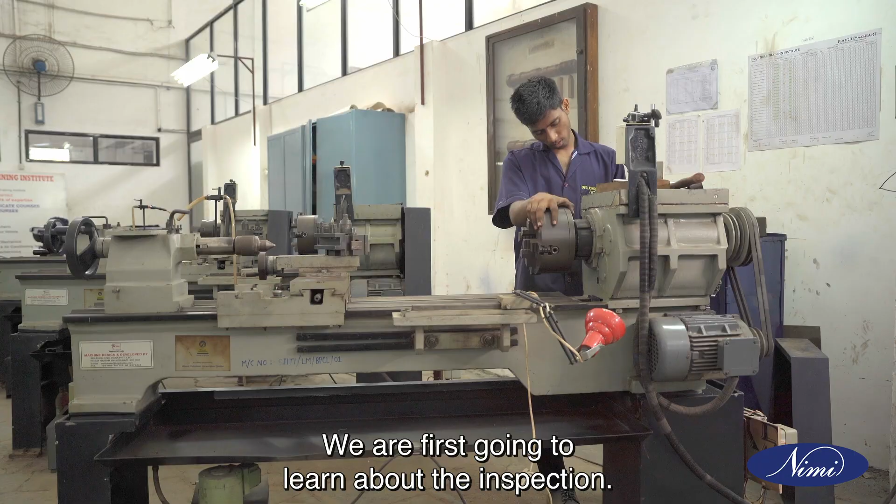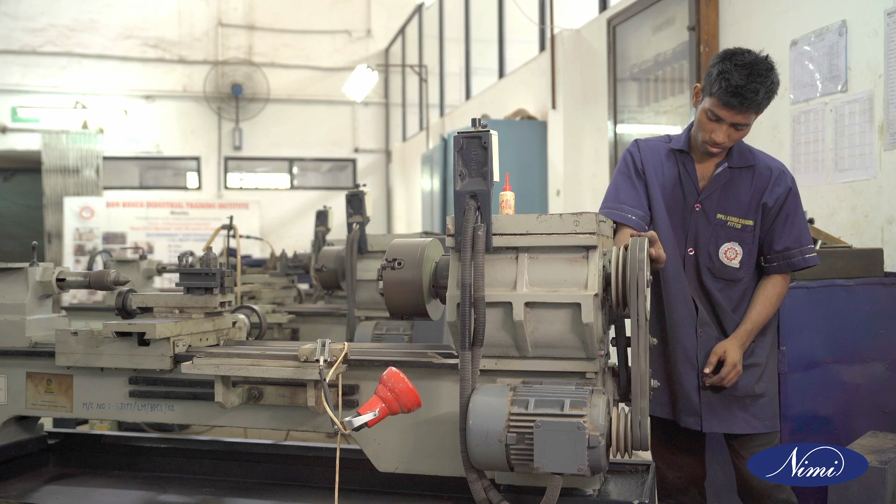Inspection is necessary for any machine or equipment where remarkable risk to health and safety may arise from wrong installation, reinstallation, or any other circumstances.

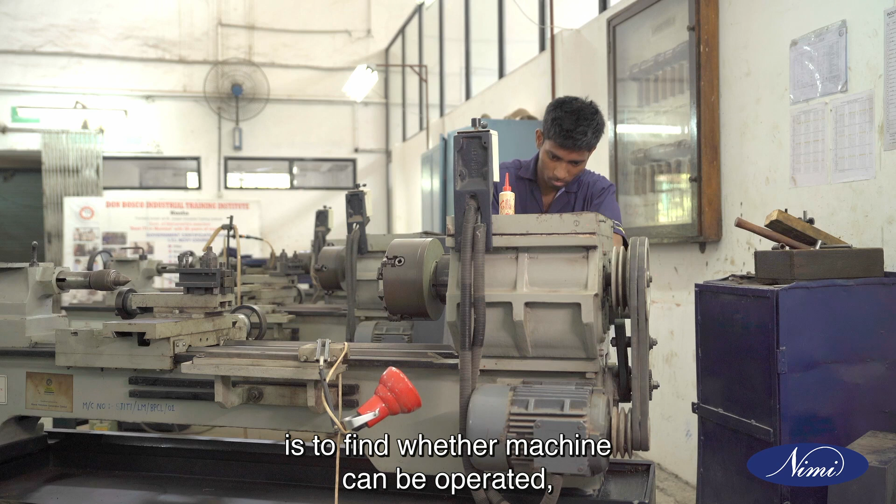The purpose of inspection is to find whether the machine can be operated, adjusted, and maintained safely. The need for inspection and inspection intervals is to be determined through risk assessment.

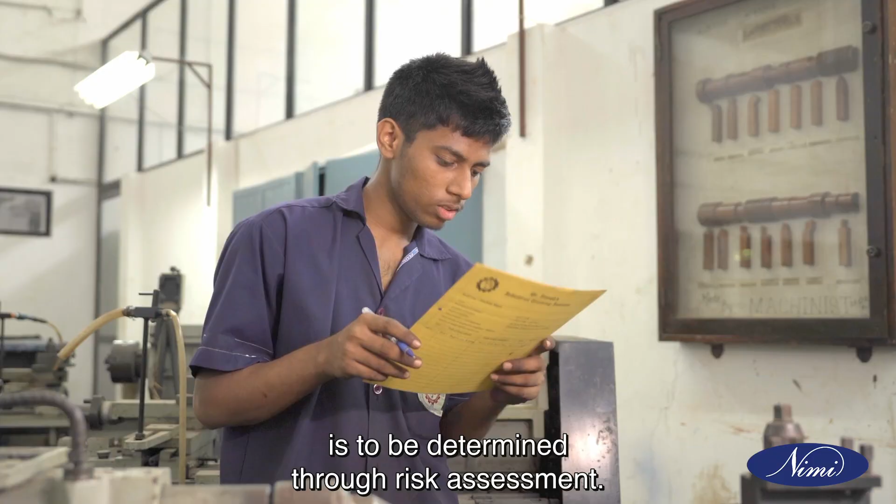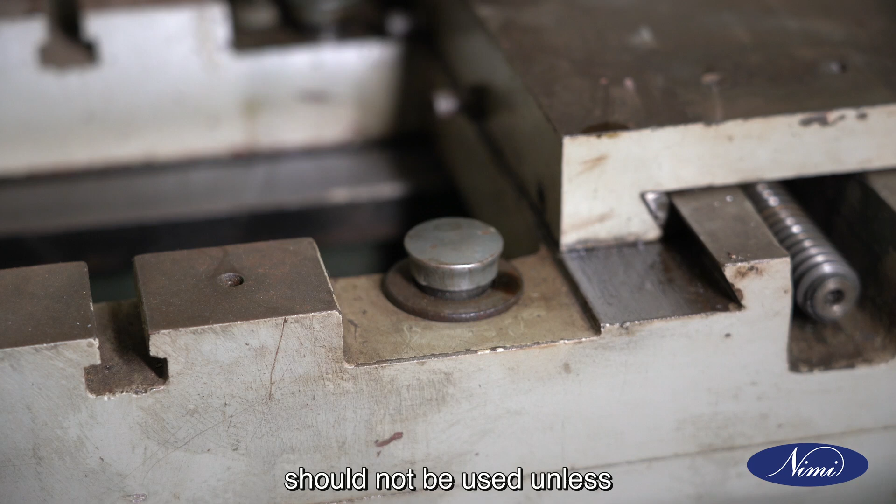A summary of inspection should be recorded and kept at least until the next inspection of that machine. Machine equipment that requires inspection should not be used unless it has been inspected.

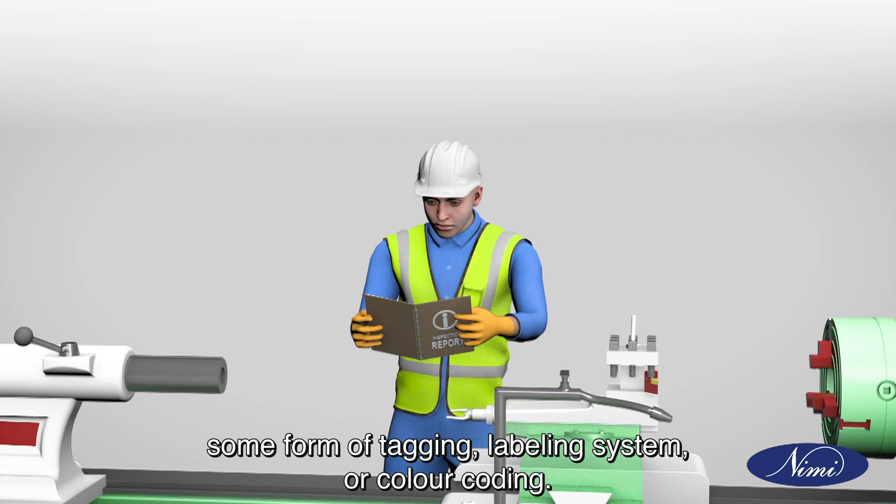If the machine equipment is obtained from any other source, one should ensure that physical evidence of the last inspection accompanies the machine, such as an inspection report, some form of tagging, labeling system, or color coding.

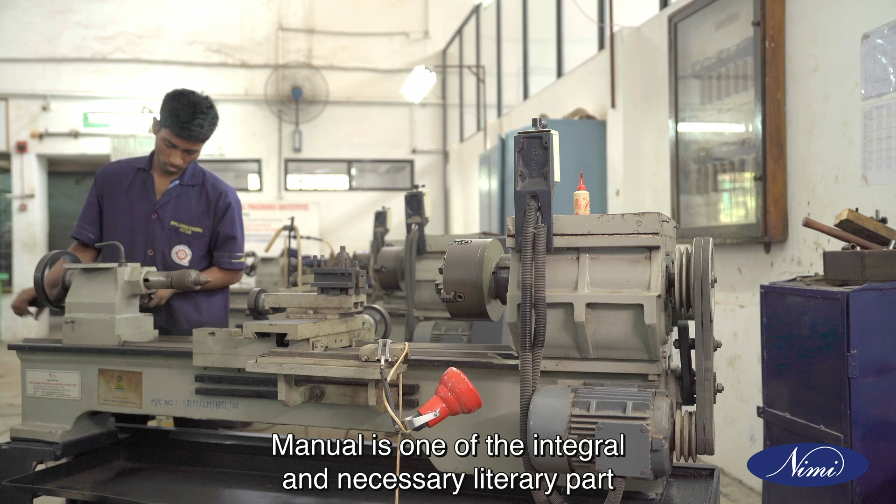One of the most important documents that can help with inspection is the manual. The manual is an integral and necessary part that the operator has to know before handling and operating the machine. It will be provided by the manufacturer along with the supply of the machine.

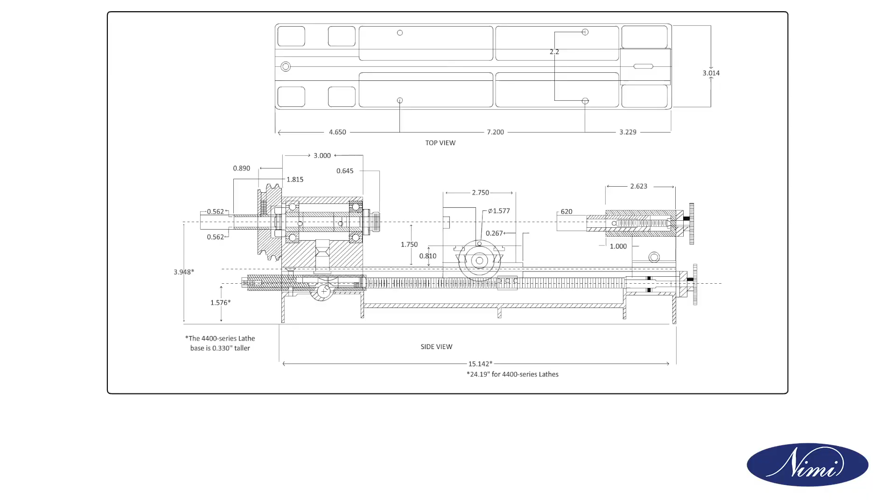The manual furnishes all information about the machine, like its size, foundation and erection method, safety procedures to be followed, operating procedure, and periodical maintenance required.

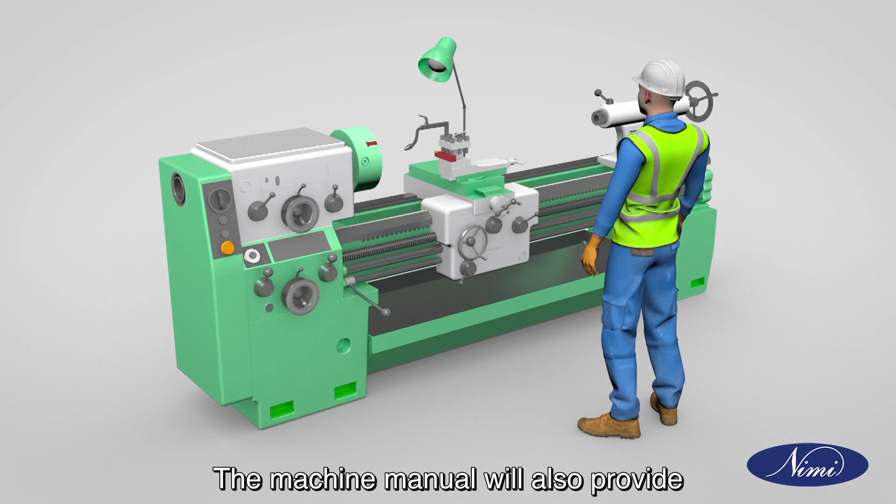The machine manual will also provide information about the required power supply, safety procedures, and grade of lubrication oil to be used. Availability of suitable spare parts and details of the dealer or supplier has to be provided in the manual. Otherwise, use of any other parts will not suit and the machine will get damaged.

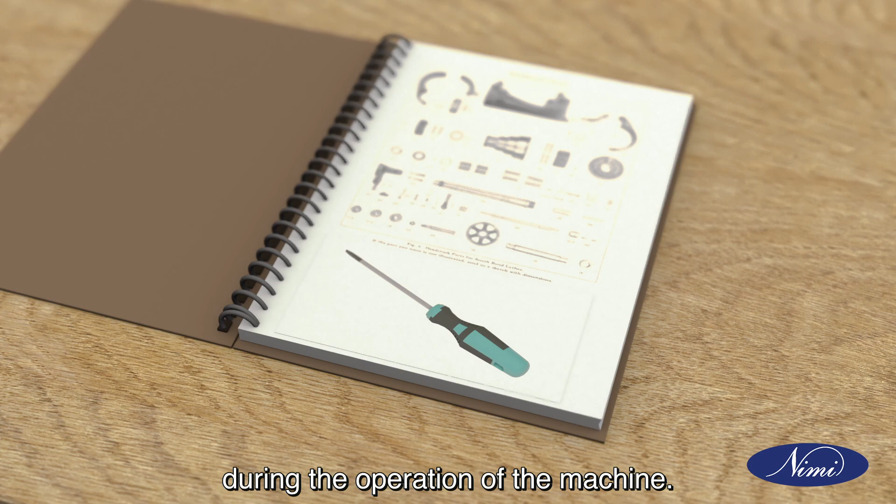We have to refer to and follow the manual if any problem or defect arises during operation of the machine. The manual will also provide the brand and type of tools that can be used, the time period or life of the tools to be replaced based on usage, and periodical inspection to be carried out.

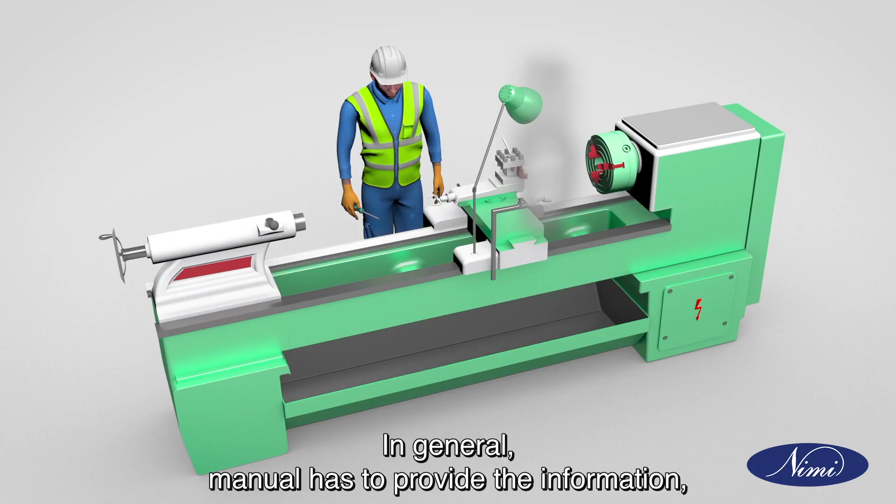In general, the manual has to provide information right from starting the machine, operating method, and stopping the machine. In case of emergency, the operator should be able to stop the machine.

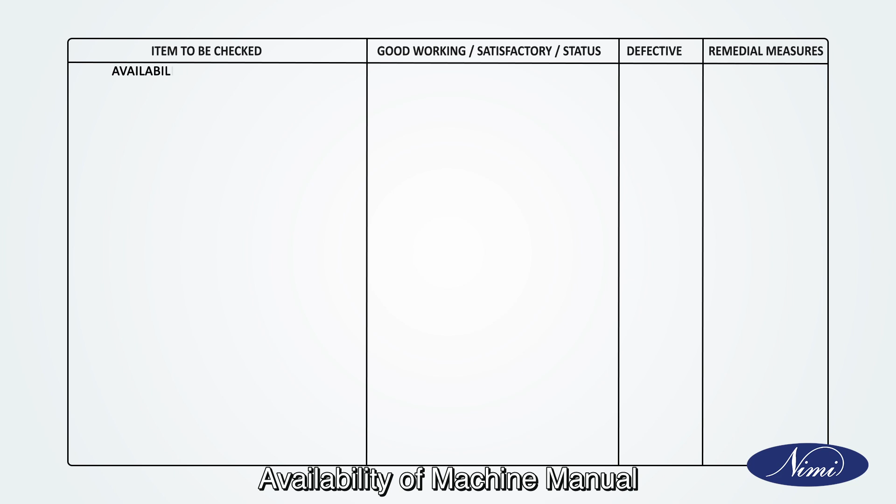Let's look at the checklist of items to be checked: good working or satisfactory status, defective, remedial measures, availability of machine manual, safety guards installation, level of the machine, belt and its tension, bearing sound.

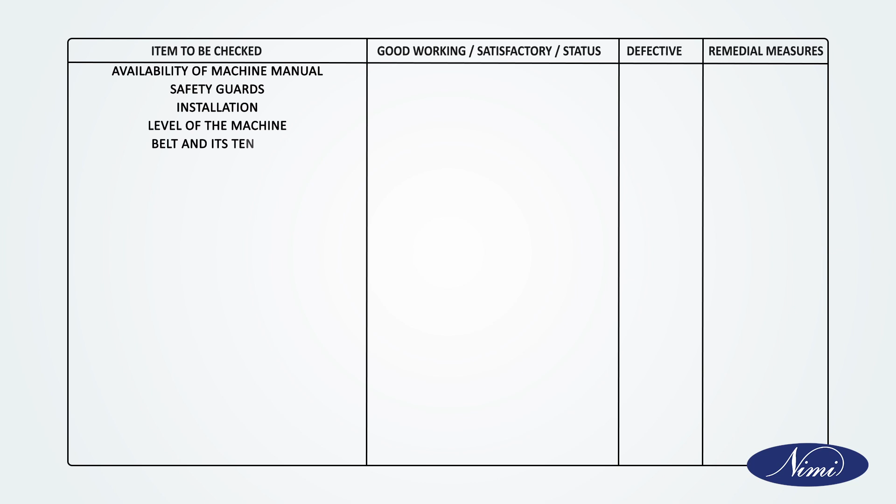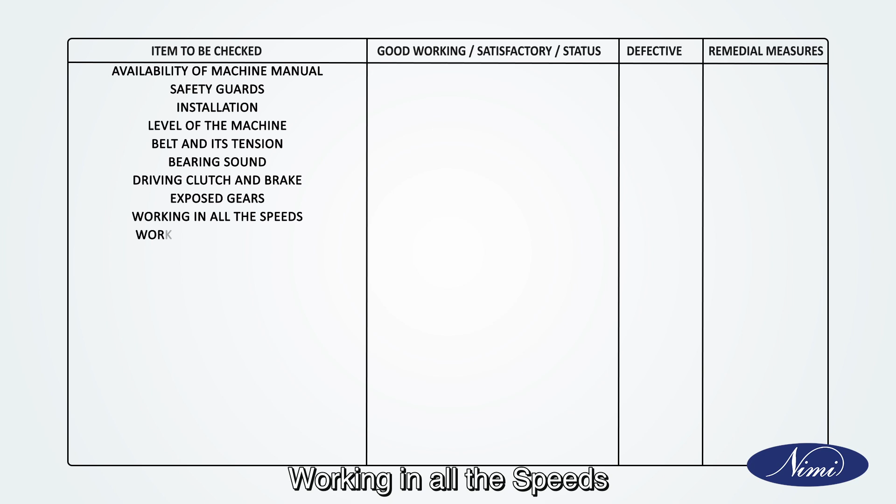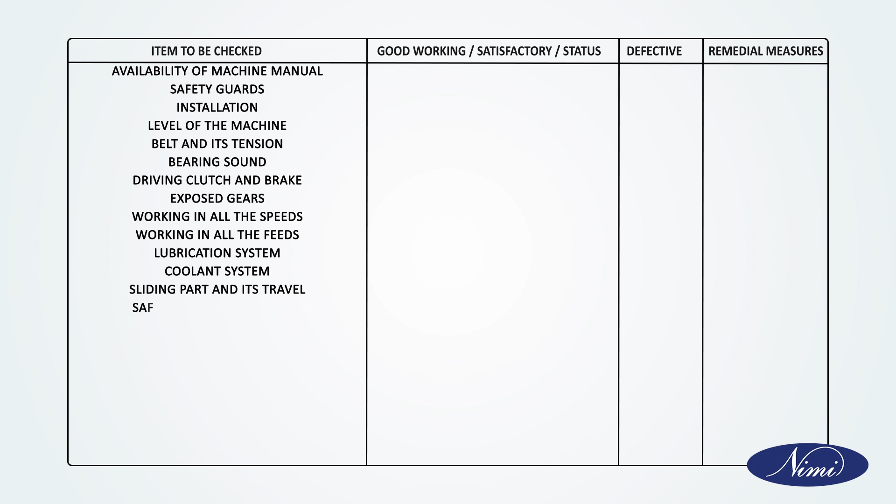Driving clutch and brake, exposed gears, working in all the speeds, working in all the feeds, lubrication system, coolant system, sliding part and its travel, safety and limit switches, electrical controls, proper lighting, emergency stop, alarm, condition of work holding devices.

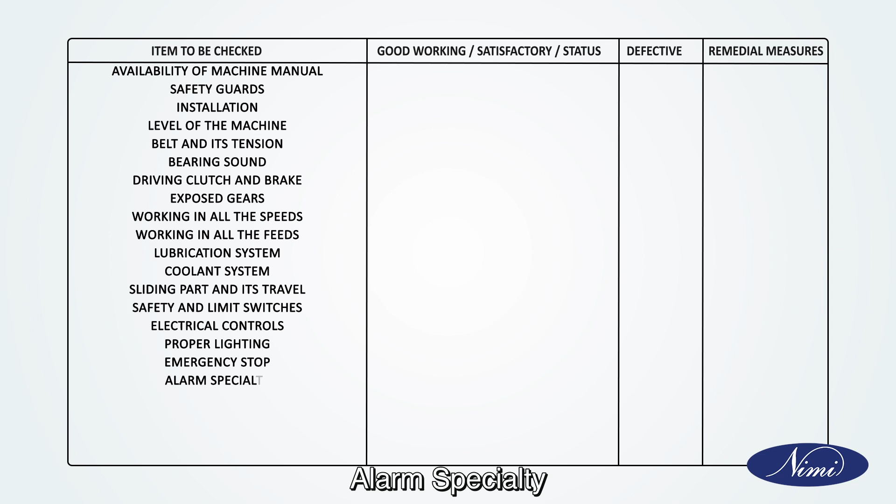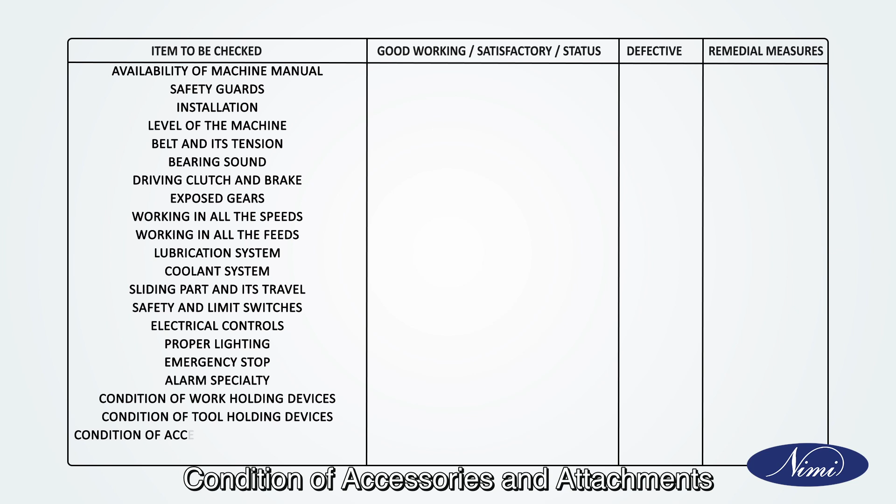Condition of tool holding devices, condition of accessories and attachments, chip collection and disposal.

Let's look at the equipment record: history sheet of machinery and equipment, description of equipment, manufacturer's address, supplier's address, order number and date.

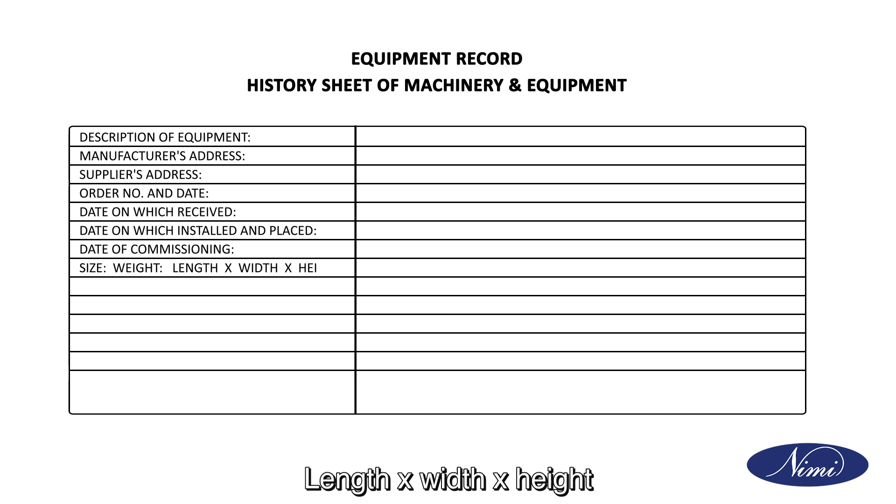Date on which received, date on which installed and placed, date of commissioning, size, weight, length, width and height, cost.

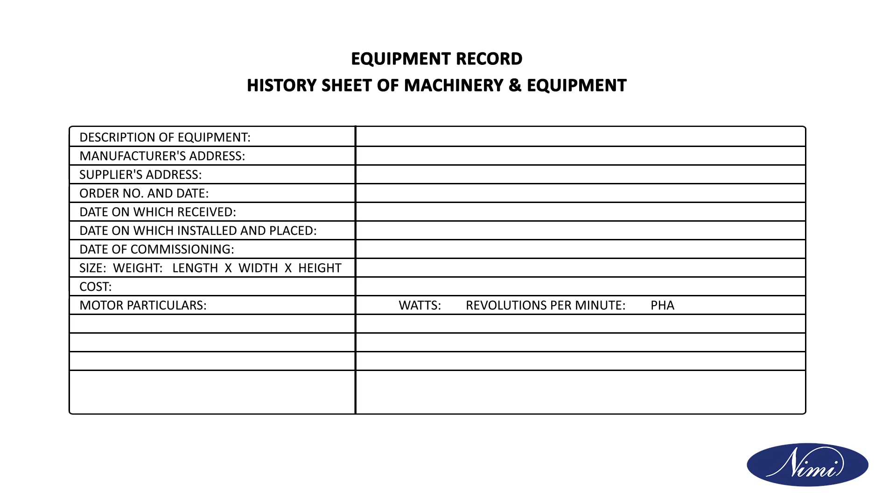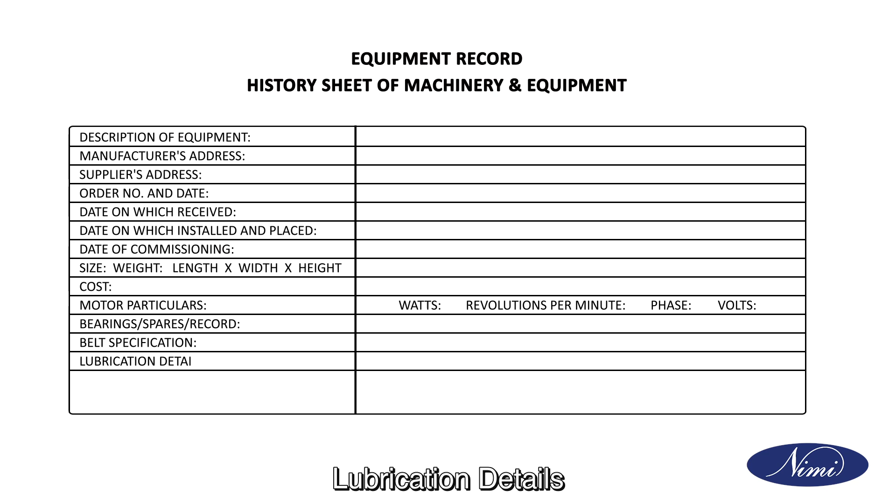Motor particulars: watts, revolutions per minute, phase, volts, bearings, spares record, belt specification, lubrication details, major repairs and overhauls carried out with dates.

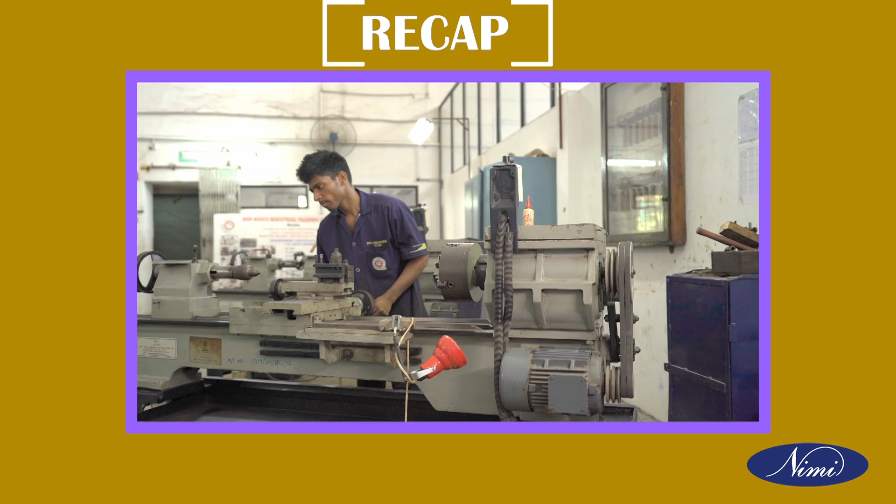Let's quickly recap what we have learned so far. Inspection on machines should be done periodically for ensuring the safety of the machine operators. A record of the same should be kept.

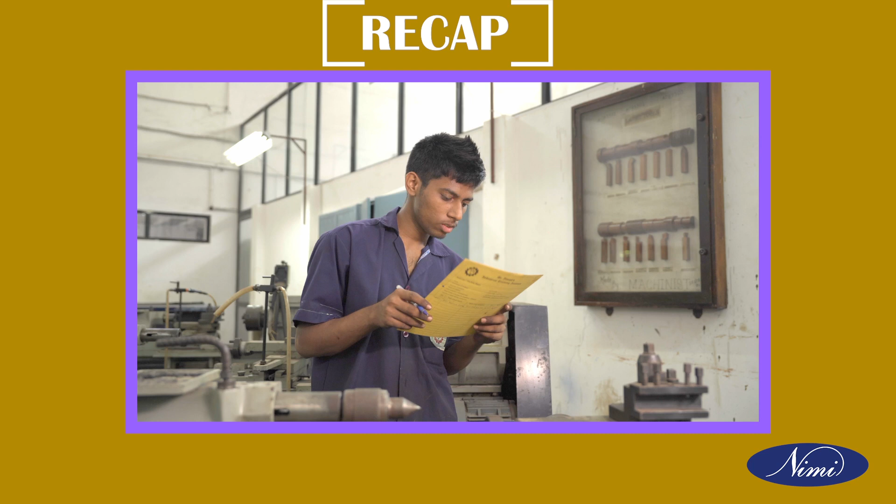Manuals are useful for conveying information regarding inspection. The manual gives information like safety procedure to be followed, operating procedure, and the periodical maintenance required.